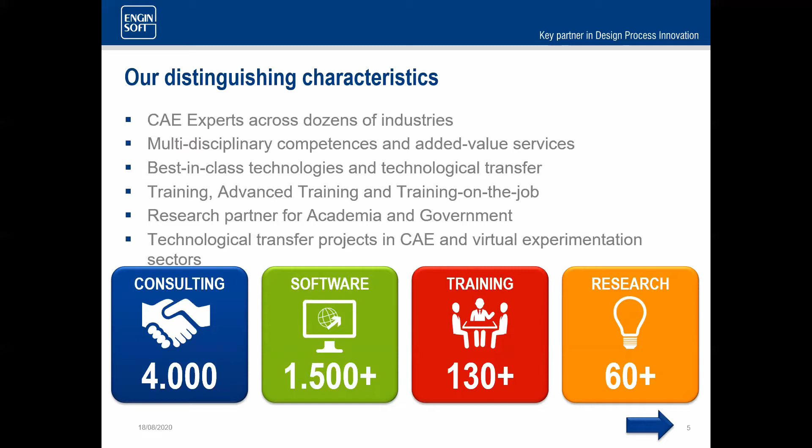So we've been involved in over 4,000 consulting projects. We have over 1,500 customers using the software that we provide. We do over 130 different training sessions per year. Obviously, the COVID situation has limited some of our in-person and annual conferences, but we've moved a lot of that over to virtual webinar type sessions. We also have been involved in over 60 research projects with different academias and government entities.

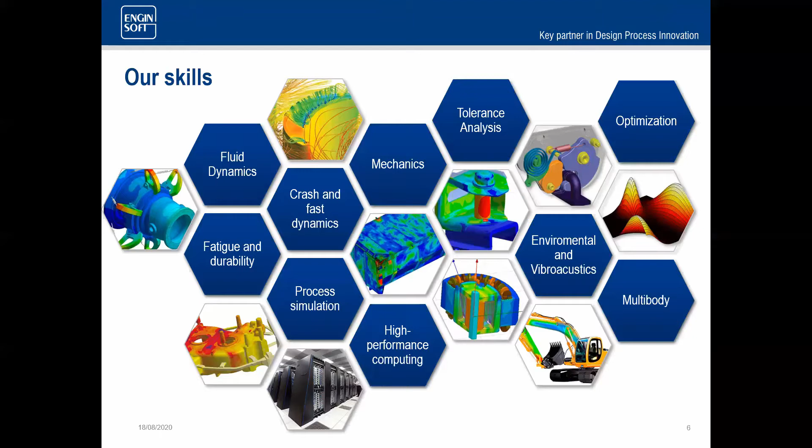So some of our skills by vertical are fluid dynamics, fatigue and durability, process simulation, crash and fast dynamics, high performance computing, mechanics, tolerance analysis, environmental and vibroacoustics, multi-body, and optimization.

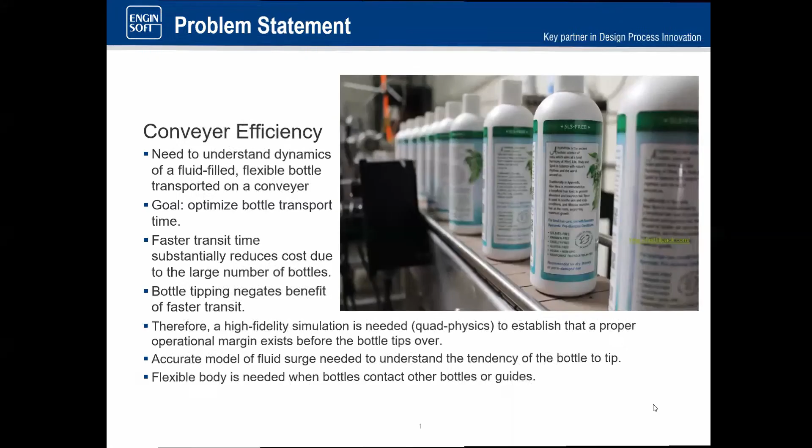Okay, so here we have a little example of some product in a plastic bottle on a conveyor line. So in these kind of situations, basically the engineers need to understand what are the dynamics of the bottles as they move around, and with issues like will they tip over? Also, what will be the issues of the interaction with the different structures that may be guiding the bottles around, as far as basically scarring things up, but there can be some other issues as well.

So the goal is to optimize the bottle transport time while still having a very reliable process. And if you have a faster transit time, then you can reduce your costs because you can handle more bottles in a given amount of time. But if anything tips over, then you've lost a lot because then the assembly line may need to be stopped and things fixed up manually. So because this is such an important area, it's really worthwhile to spend the time to do a careful simulation.

And in this case, a careful simulation requires looking at different types of physics to get the correct answer. And in this case, we're going to talk about quad physics because we're going to talk about the use of 4 different simulation technologies together. And we'll see that it does make a difference to include all the different aspects of it.

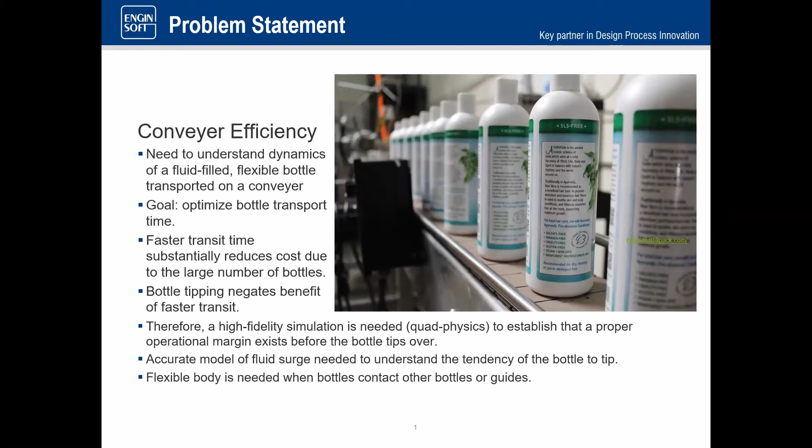And, as you can guess, this will be based upon RecurDyn, and we'll be also looking at Particleworks for the fluid, and that will allow us to understand the surge that may occur due to the fluid moving around when the bottle is under acceleration. And then we're going to use the FFlex capability in RecurDyn as well, and we'll be reviewing all that.

But this is what we want to get to. So this is the bottle. It's under acceleration, and in this case, this is just a bottle, a rigid bottle. Oh no, this is a flexible bottle, but it doesn't have fluid in it. And in this case, we can accelerate this bottle at an acceleration of 4.8 meters per second squared. And as you can see, the bottle is sitting there calmly on the conveyor belt and not tipping.

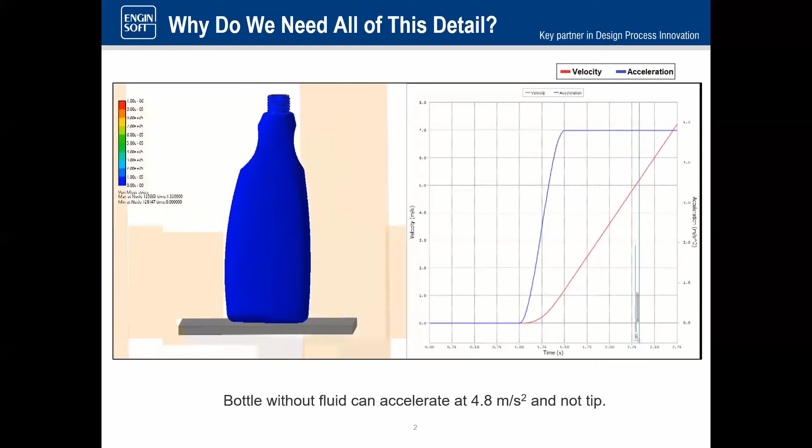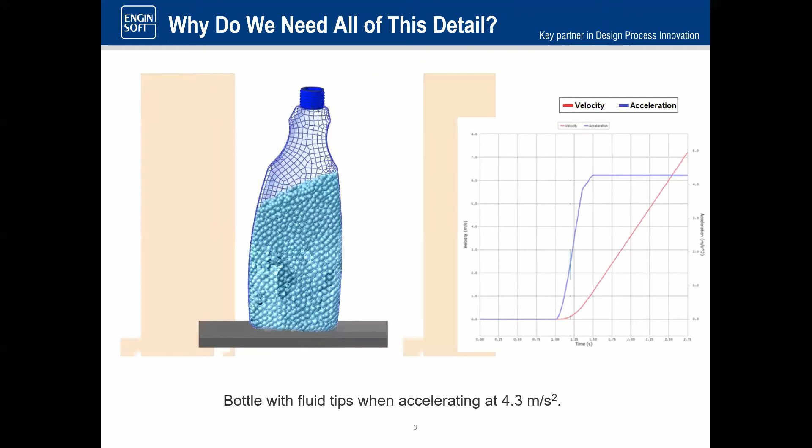So if this was how the simulation was done, the engineer may report that we can go up to 4.8 meters per second squared. But then if one actually tried it, we're slowing down to 4.3 meters per second squared, and even in that case, by including the fluid as part of the simulation, we can see that the bottle will tip over at this lower, significantly lower, more than 10% lower acceleration, and the bottle is in fact tipping over.

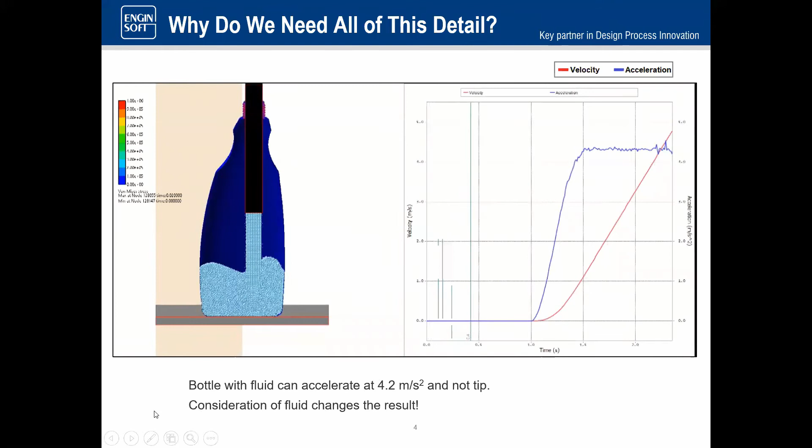So with more iterations, one can find—here we're going to repeat it again. In this case we have smaller particles, and at an acceleration of 4.2 meters per second squared, the bottle is able to maintain its position on the conveyor and not tip over. So from 4.8 to 4.2, that's quite a significant difference that we see because of the multi-physics.

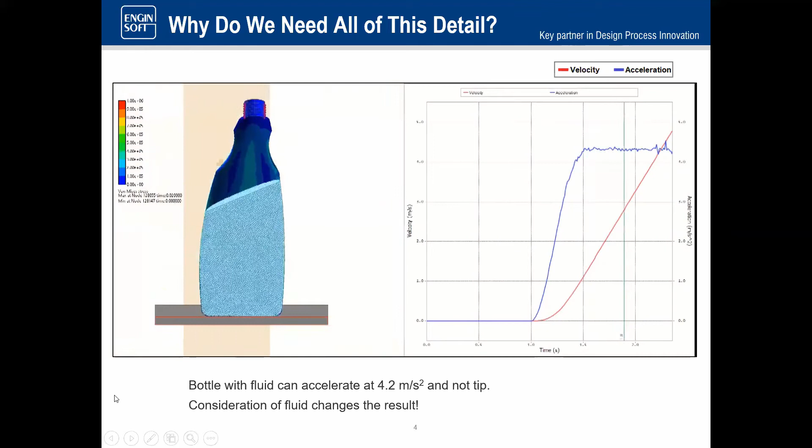So the rest of the presentation, we're going to review how we were able to get to having this model that could do 4 different types of physics together. We'll also talk about some best practices when doing this kind of multi-physics simulation, the solution approach, and then we'll summarize.

So it's a situation where you can't really do things separately, because the flow is going to deflect the structure, and as the structure deflects, that will influence how the flow is happening. So they interact with each other. That's why you need some kind of co-simulation—you need to simulate these things together and carefully look at what the effect of one type of physics has on the other, and backwards as well.

Basically, seeing the utility of doing this multiphysics, there's a variety of software packages that have enabled some level of multiphysics capability. That involves architecting the software to be able to do co-simulation, pass data back and forth, whether that's internal to the package or an external co-simulation—either way is a possibility. A key aspect is having an open architecture, as well as custom interfaces to have different technologies working together. So the FSI was the first multiphysics.

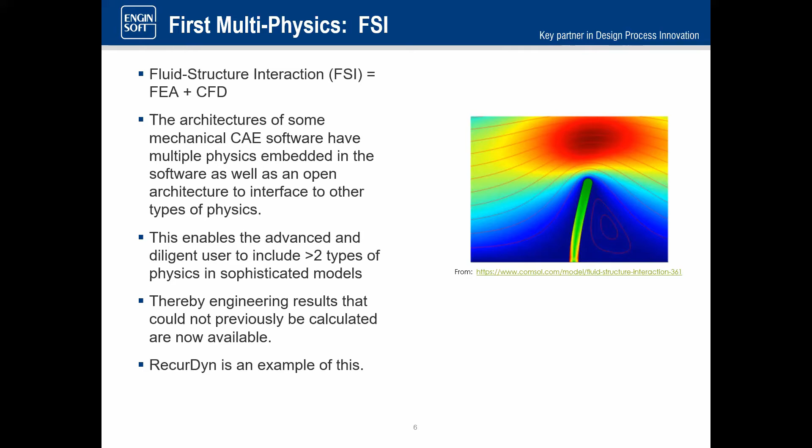So in our example, looking at the basic conveyor system that we had—that's a multibody dynamics problem, a very simple one—that was done in the RecurDyn multibody dynamics. Then the bottle itself was modeled as a nonlinear flexible body with FFlex, and we could do the nonlinear flexible body with contact, which is key to this. And then the fluid is simulated with ParticleWorks.

The key thing about the interface between ParticleWorks and RecurDyn is that, with our most recent versions, even with the full flex bodies—nonlinear flexible bodies—our interface is able to support interaction between the fluid particles and the target bodies of interest. So even when the bottle itself is flexing, that is still interacting with the particles, and all the changes to the surface geometry are taken into account. Basically, the element faces of the full flex body are used to provide the contact surfaces that the particles interact with.

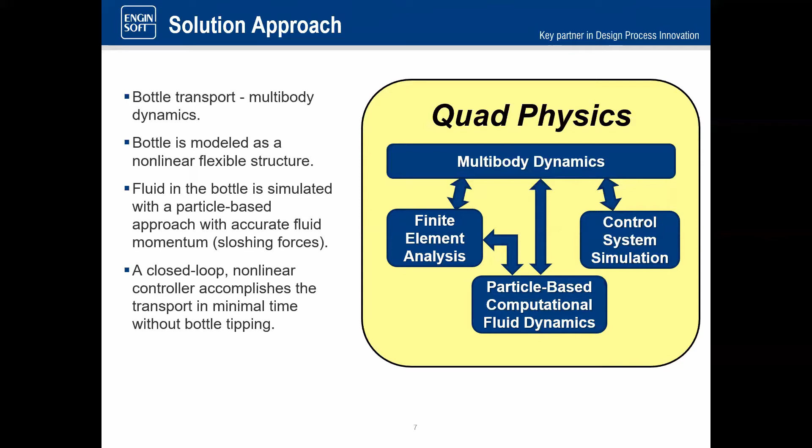So when doing multiphysics, the complexity of what's involved really depends on what kind of physics you're doing, because that determines what kind of data has to be transferred. In the case of a controller, if we have one or a small handful of inputs and a similar number of outputs, that's very easy to understand and computationally easy to handle.

But it's where you get many-to-many interactions that things start to get a lot more complex. The prime example is the interaction between the fluid in the bottle and the bottle structure itself, because the contact surfaces are all the different element faces, so there's lots of them, and then tens of thousands, hundreds of thousands of particles. So we have to keep track of all those particles interacting with all those different element faces. But thankfully, all that's automated.

In between is when the bottle is interacting with some kind of guiding wall, then you have many finite elements interacting with the wall geometry. Again, all this is automated. Basically, all we have to do is identify what surfaces are going to be interacting, or what bodies are interacting with the particles, and then all of the element faces are included automatically.

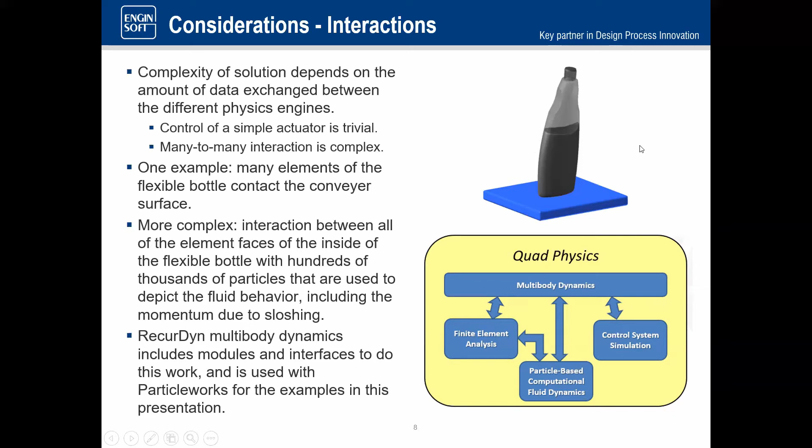So in setting up such a simulation, there are some factors that are very important. One is how to set up the model in a reasonable way, taking into account the dynamic response. The dynamic response is important because it influences the time step needed to get accurate answers.

So basically when you're doing multi-physics, whichever aspect of physics requires the smallest time step is going to determine the overall time step, because we can't allow any aspect of the simulation to lack proper accuracy. So we want to look and see what these different time steps are, and in some cases maybe we can make adjustments, or this is feedback to us that we need to change the design a little bit.

As far as time step for the structural analysis, that's really determined by the material properties, modulus, and so forth. The stiffer the structure, the higher the frequencies that may occur in it, and therefore the smaller the time step needs to be.

In the case of particle-based fluid, the size of the particles determines their mass, and the frequency-type behavior in the fluid is a function of those particle masses. So as the particles get smaller, the appropriate time step that should be used also becomes smaller. Anyway, all that should be looked at.

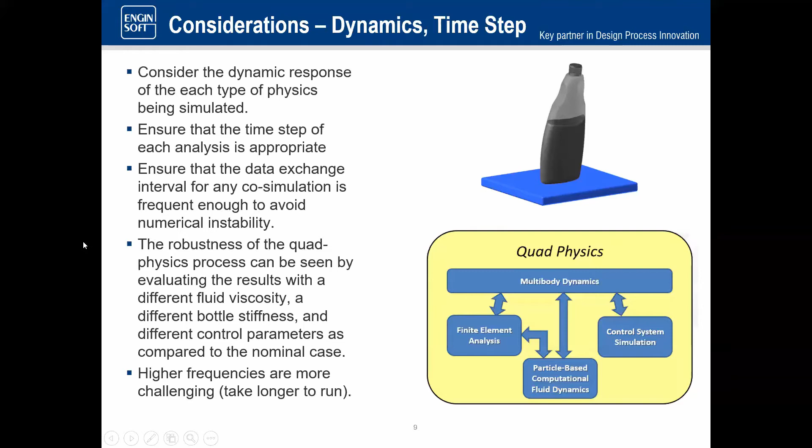So when you're ready to put together your first model, just remember the old adage that you want to crawl, walk, and run with these models. That's true with multi-body models as well. What crawl, walk, and run means is that you need to fight off the urge to just assemble the entire model all at once and run it, because when you do that, the debugging becomes very lengthy, since the run times are long and there are many possible sources of error.

So in this case, the crawl, walk, run approach is to first do each aspect of the model separately. Get your multi-body dynamics model all assembled and tuned up. If need be, if you're going to have flexible bodies, just put them in as rigid bodies to start and get everything else set up. Then you can add things in.

The most time-consuming aspects of these models are going to be the nonlinear finite element bodies, and also the Particleworks aspect of the model. Those two are going to be the most time-consuming. The control system capabilities are not computationally intensive, and generally the rest of the multi-body system is not too bad either.

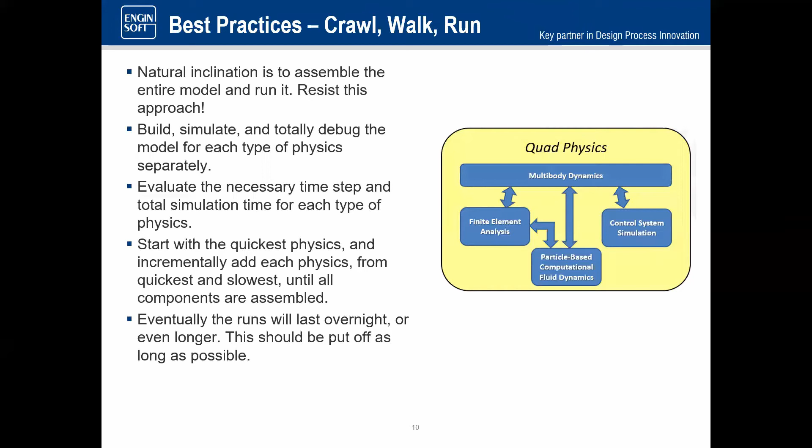You want to put that off as long as possible because then the time to tune the model, that whole process becomes very slow and tedious. That's why you want to do all the tuning of the individual segments of the model first.

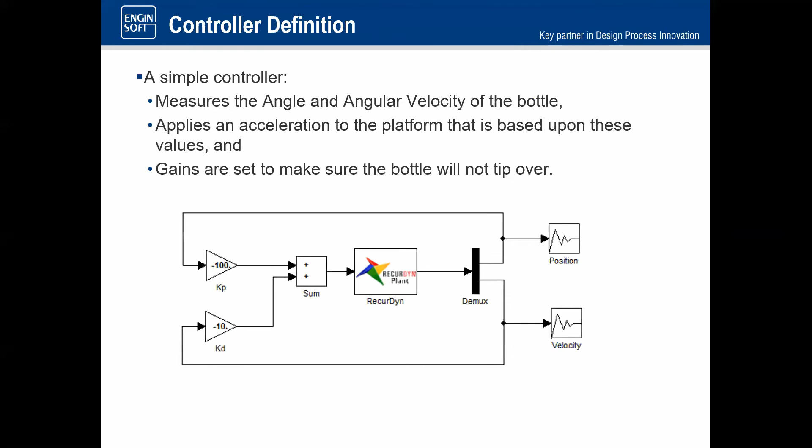So in this case, looking at the controller, we just did this with CoLink, very straightforward. We were just monitoring basically the tipping angular measurement and the velocity with respect to the direction it was being accelerated. So we could just focus on that particular rotation.

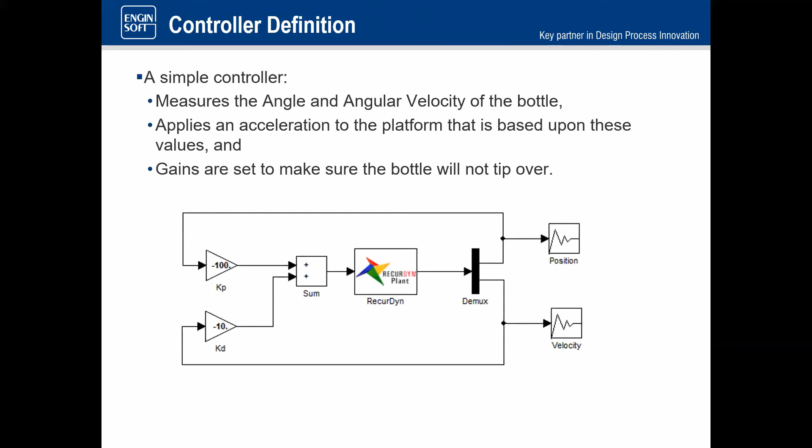So we just have these two basic outputs that we're looking at, and then we used that information to be able to affect how high the acceleration was. Basically the gains were set to make sure the bottle would not tip over.

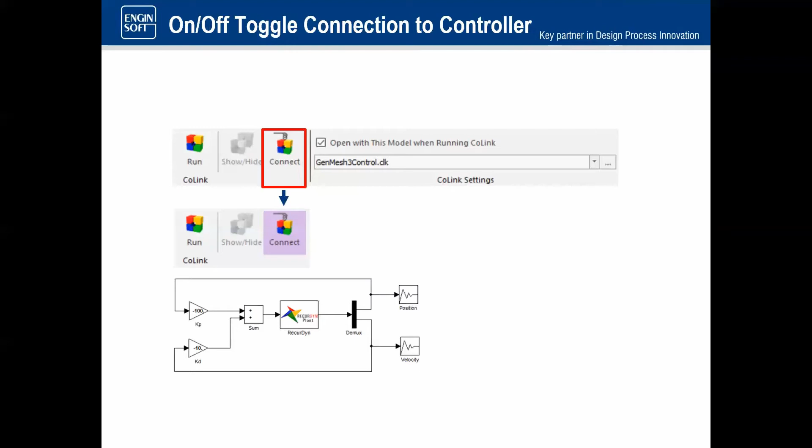A nice thing about this interface with CoLink is that this connect icon, you can toggle that on and off. This really makes it easy to do this piece-by-piece approach, because if you want to not include the controller, you just toggle off that connect icon, and then it's not included in the simulation. That really makes it helpful to do things separately.

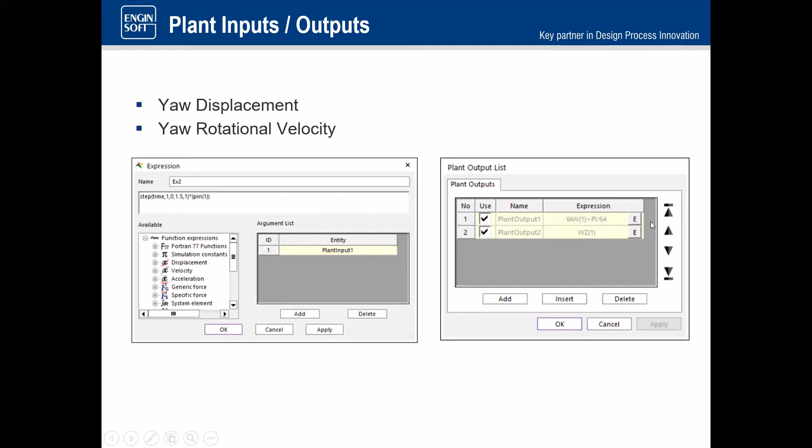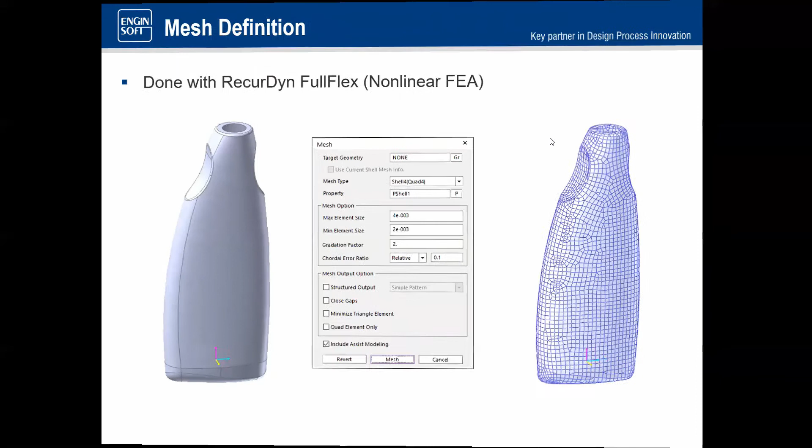Then for Particleworks, as you saw with the animations, we started out by filling the bottle with fluid and letting the fluid settle in. That actually took about the first second of the simulation before we applied the acceleration.

This shows that in Particleworks you have this inflow entity to do the fluid source, and you can define over time the volume of fluid that's coming in, which is set up by having a definition of the velocity over time. Also here we have the ability to move the position of that filling tube over time as well.

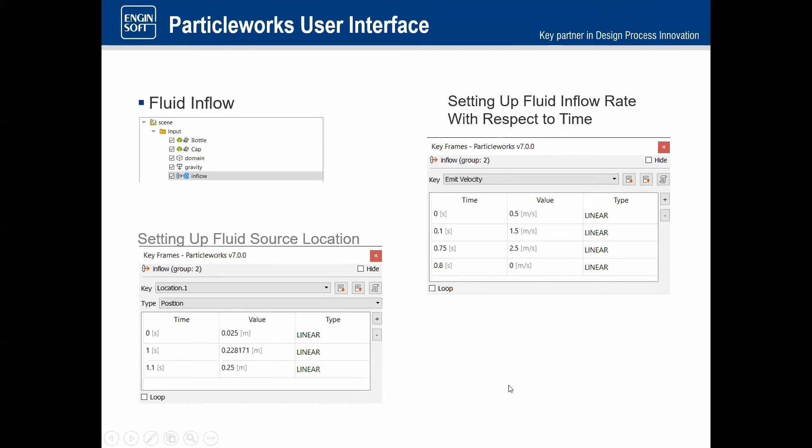Then fluid properties are basic things: density, thermal conductivity if you're doing thermal analysis, and same with specific heat, but basic viscosity and surface tension are the inputs of the fluid itself. There are other inputs that have to do with adhesion of the fluid to the walls that it's interacting with, and other inputs as well, but these are the fluid inputs.

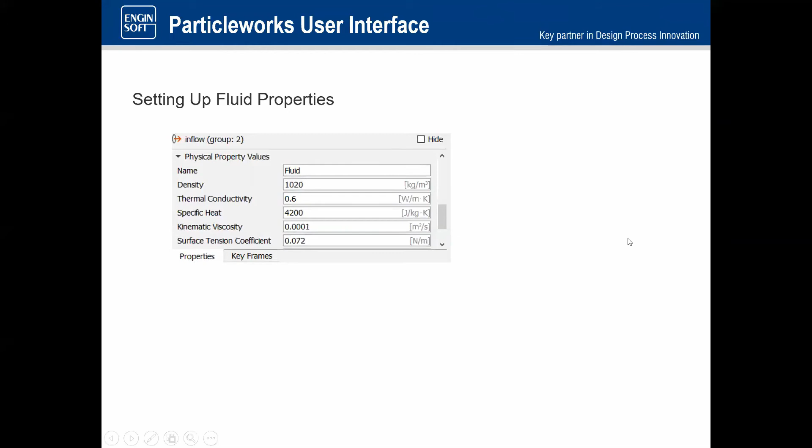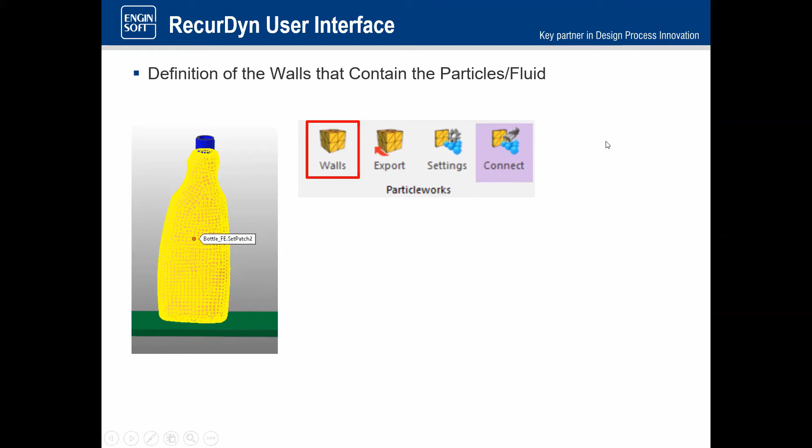And then just like with the CoLink, we have this connect option so that we can include Particleworks in the co-simulation, or not include it just by toggling this connect, so that we can be able to tune things without everything being there.

And then the second one is the second icon. We export the walls, and then we get a wall file, and this wall file refers to a bunch of object files. That wall file is all you need to reference to import the geometry from RecurDyn into Particleworks. And so then the geometry comes into Particleworks, and it's understood to be interacting with the particles correctly.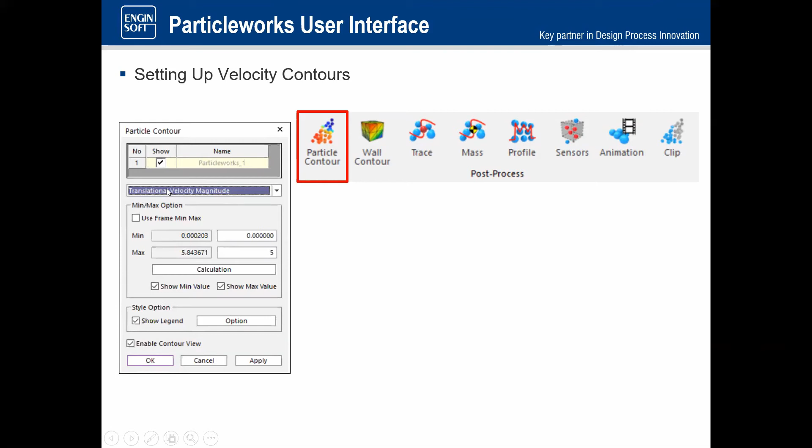And so then it will colorize the particles based upon whether it's at the min or max of the range of velocities in this case.

Okay, so what we've just explained lets you know how we got to having this quad-physics model, and all the different steps that were involved with it. So this is the same animation we were looking at before, but now you can see how the filling tube is raising up and shooting out with certain velocities. And then you can see the particle size definition and so forth determines how many particles are going to be ejected over time, and how many are included in the model.

And then on the plot on the right, the red is the velocity. So we start out with no velocity, then at 1 second, we're assuming that things are settled down, the particles are settled. And then you can see how the surface of the particles went from flat to having this slant to the free surface on the top as the acceleration was applied.

And you can see the acceleration being applied starting at 1 second, and then it's ramping up because of the function. I don't know if you remember that function, but there was a step function that ramped up the acceleration, but then the interaction with the controller brought it to pretty much a steady state value.

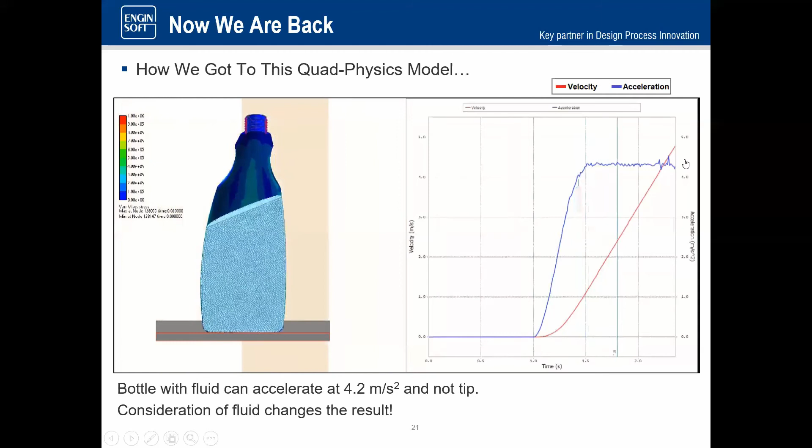But you can see a little bit of chatter in the acceleration value because you have some minor effects of the fluid still moving, even though the free surface looks pretty stable. The particles themselves are still rocking back and forth a little bit within their own space. So that's just kind of reflecting some of the momentum that's still there in the bottle.

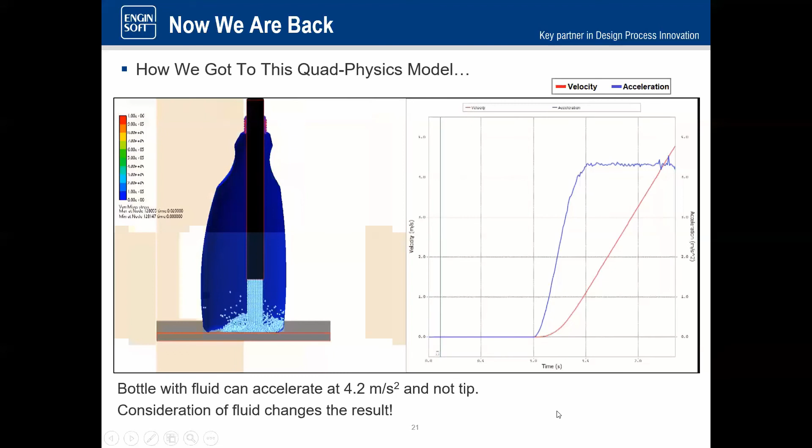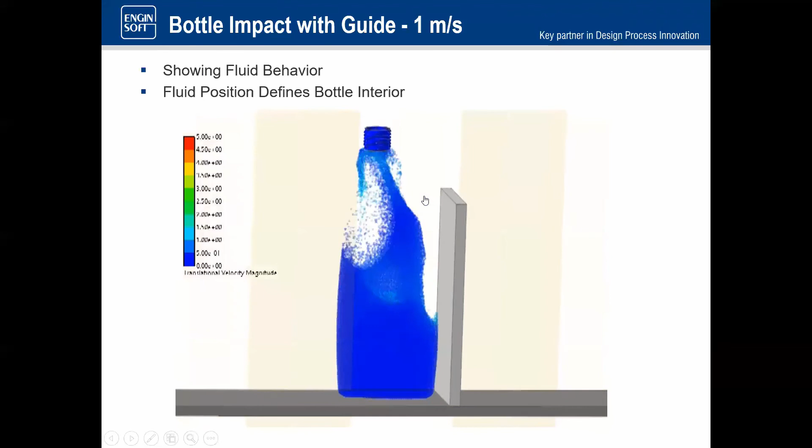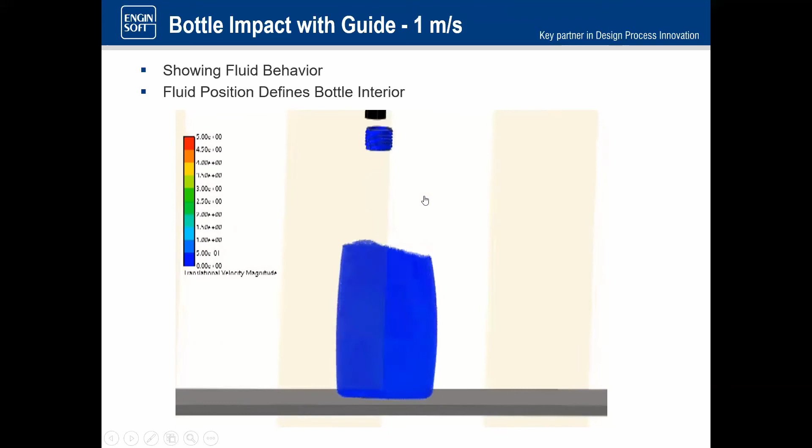So now we're going to look at some different types of scenarios with the bottle. So in this case, we only see the particles, but we're going to impact a wall, and then you can see as the impact occurs, you can see the rest of the bottle enclosure just because of how the particles are limited in their motion as they slosh around. So clearly impacting the wall is a fairly dynamic event, and that's reflected in how the sloshing is going all over the place.

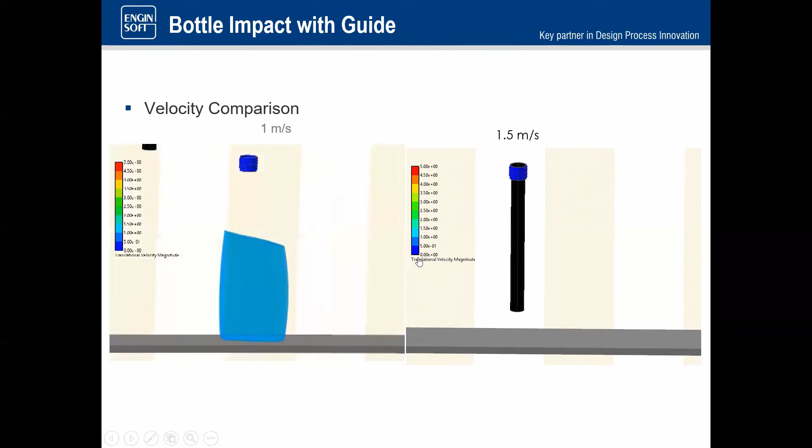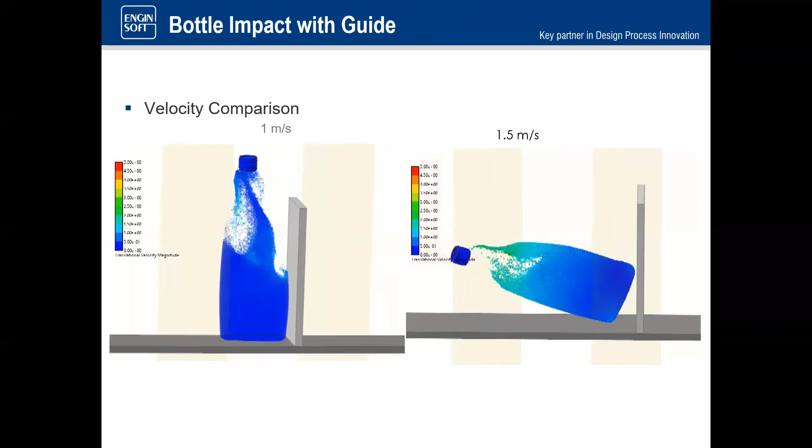Okay, so now we're going to compare things to say, okay, what kind of stresses are we going to see in the bottle? Well, in this case, we're still looking at the fluid and velocities. But then what's that like at 1 meter per second when we hit the wall versus 1.5 meters per second? So the one on the right is going to have the faster velocity, so we would assume more energy when we hit the wall. And in fact, that's enough energy for it to rebound and tip over.

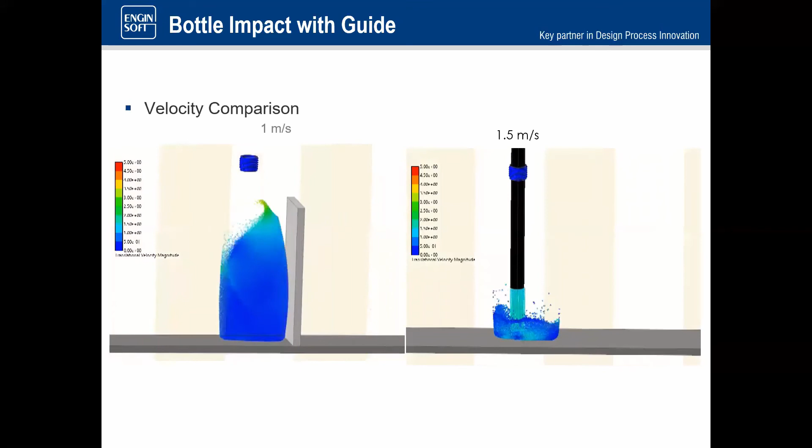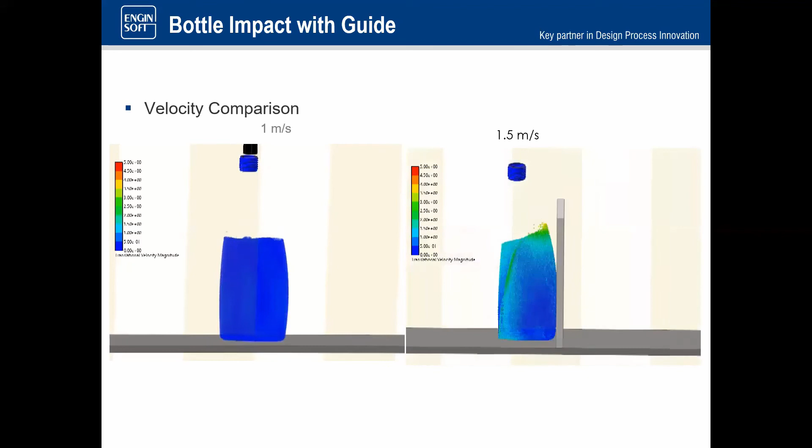So watch that one more time. So again, 1 meter per second, it hits, sloshes, but remains upright. But 1.5 meters per second, it's too much energy on the rebound and it tips over. And again, the fluid sloshing is contributing to the tipping.

Okay, so in this case, in both situations, we're going to have impacts at 1 meter per second. But on the left, we have the base case where we have the standard modulus. And on the right, we're experimenting to say, well, what if we reduce the Young's modulus of the bottle by 50%? How does that influence the stresses seen by the bottle?

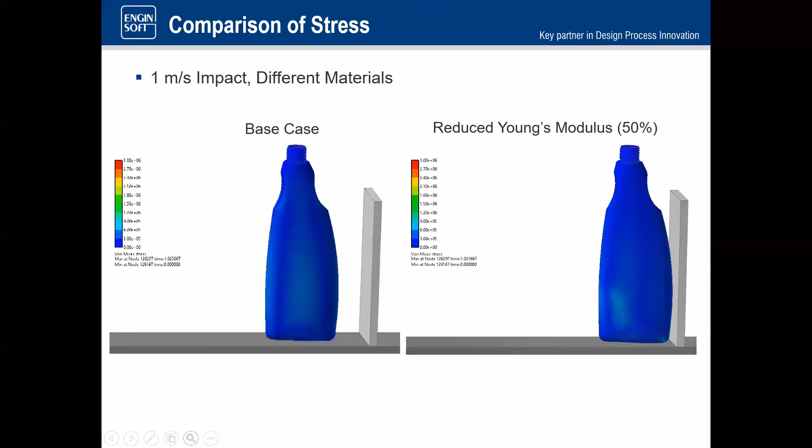So you can see the pressure wave going through the bottle due to the impact and stresses distributing. When looking at these animations, these are consistent scales, so it seems like there's less red, but it's not so easy to compare. So really the best way to compare is to take each animation and find the frame that shows the worst case as far as the stresses are concerned, and then compare those two cases.

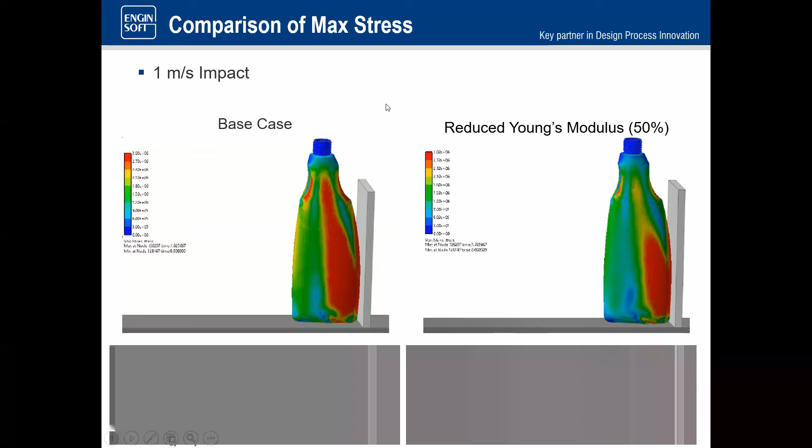So what we can see is that the bottle with the reduced Young's modulus does show lower stresses because the deformation can spread itself out a little bit more effectively and not be concentrated. But, again, quad physics, many different factors. Sometimes the results are a little bit different than what we might expect because we're not anticipating some of the interactions between the different types of physics. So we get a lot of intuition.

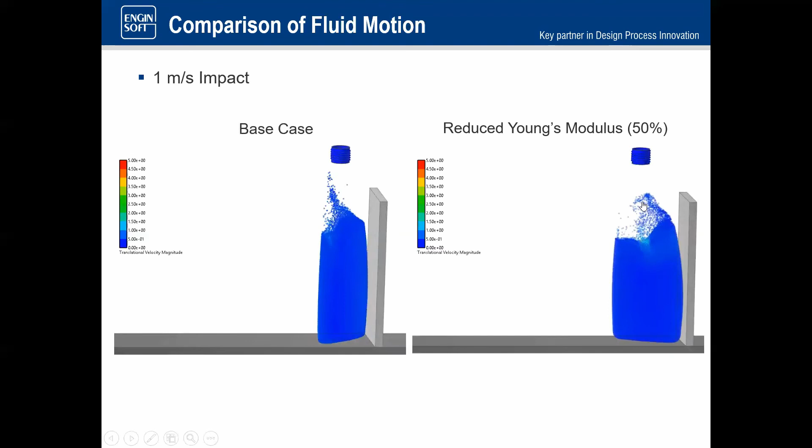So this is comparing with the reduced Young's modulus as far as what the fluid's doing. You can see there are differences in the fluid behavior. How would we describe these differences? There are different things you can look at. You can look at what's happening with this jet that shoots up. You could also be studying velocities throughout. There are many things that can be looked at. It is possible to do cutaways and so forth to understand what the particles are doing at different depths of the fluid.

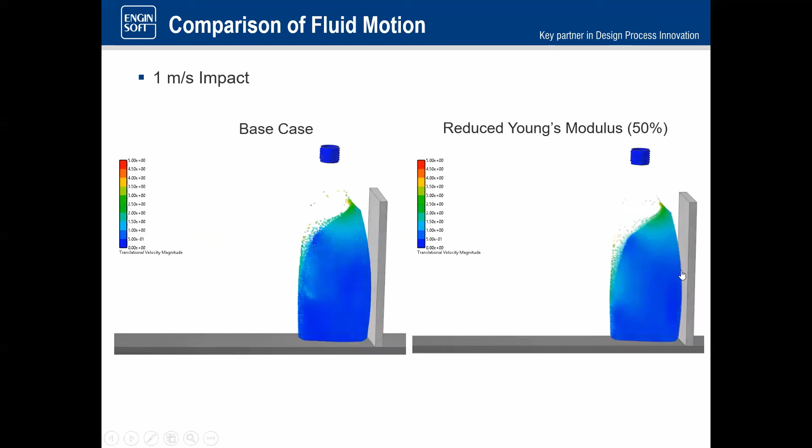And then once you understand what the key behaviors are, it's a combination of knowing what key animation viewing parameters you want to set, as far as the cutaway settings, as well as what angle and so forth. Then you'll know how to show things and be able to explain things to people. Second thing is to identify what the key output values are, such that you can set up to automatically plot those things.

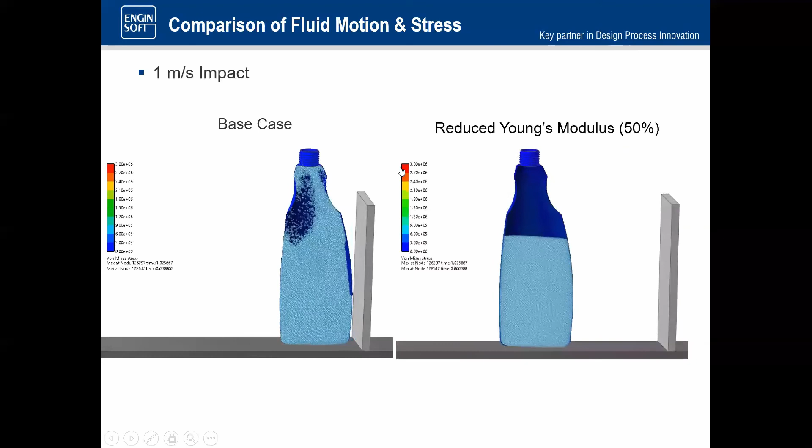So in summary, quad physics, doing 4 different types of physics at once, definitely is something that can be done today, and RecurDyn really has great capabilities to support that. Different types of co-simulation can be done, and also open architecture, where we have the application programming interface for controls and hydraulics, where you can embed anything you want with that subroutine interface. Co-simulation not only with particle-based fluids, but also discrete element modeling, the granular type things, through the EDEM software, so you can look at non-spherical particles interacting.

And as we've seen, by including all the different types of physics, we see better model fidelity. In our basic example, by including the fluid, the tipping performance was not as good as it seemed when the fluid was just modeled as a fixed mass. When you do this kind of work, you want to pay attention to time step and handshake rate. RecurDyn does a lot to automatically handle this properly, but you still want to do a bit of checking when you first do a particular type of model, just to make sure that's right.